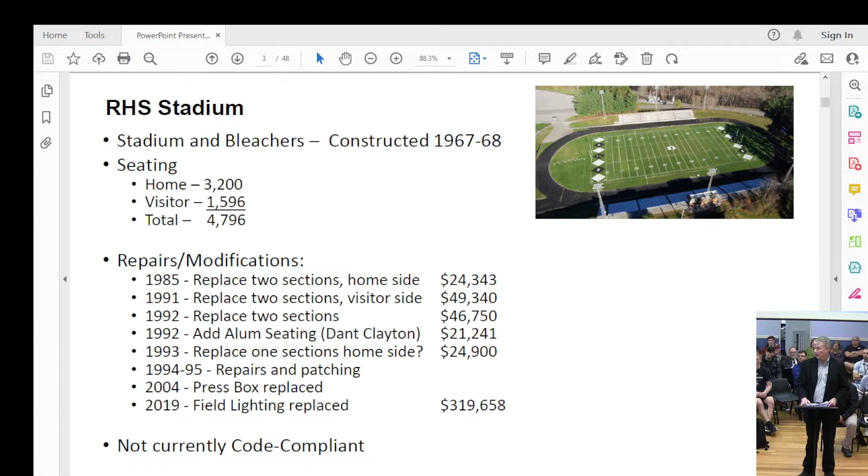My understanding, I think Mr. Coffey maybe took this photo, I'm not positive, but I think I saw it on the boosters. No? Somebody said someone had a drone. I stole this off the booster site because I thought it was a nice, relatively recent photo.

It shows the field nicely groomed. You see the new lighting's in place, and the stadium everybody knows and has come to love. I'd say it's the envy of most schools in Southwest Virginia. It's certainly one of the nicest places. The playing surface itself is, I'd say, second to none for natural turf across Virginia. It's a beautiful place, and I always enjoy going there. I've watched my own children play and perform there, and they still do today.

So a very nice place, but keep in mind it is 55 years old now, so it's going to age just like the rest of us. I'm a perfect example of that. So here's our home side. As I said, seating on this side is about 3,200 seats. You can see where the aisleways are right now, and some of the reasons why it's not considered code compliant.

When people say ADA, it's not just about wheelchairs. ADA covers all sorts of disabilities and just being mobile and how you move around. Obviously it's difficult to get up to where the seating is, and there are no designated wheelchair areas. From a building code standpoint, there are no railings to speak of. The stairways have no railings. There are no guardrails on the sides. The guardrails in the front are too low and don't have intermediate pieces. So there are a number of code issues.

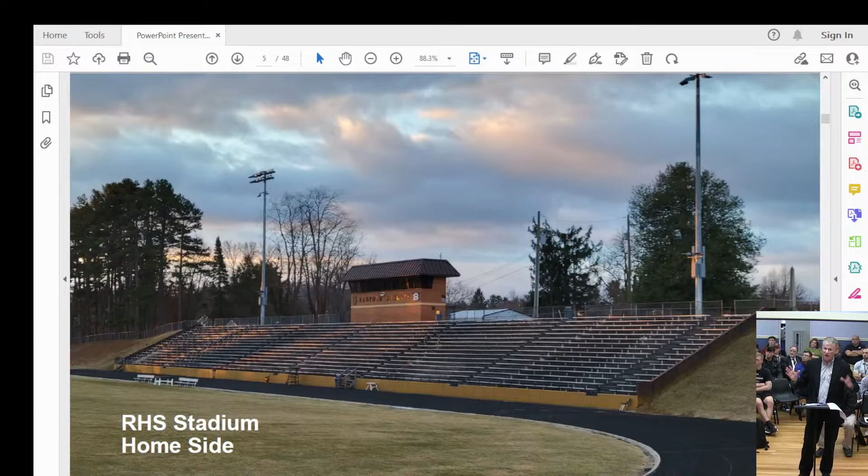But overall, the structure, particularly the frame, based on our recent analysis, is in really good shape. The brick really needs a good cleaning, and a lot of the joints could use some repointing. But the front wall, the concrete, shows no signs of stress fractures, and the frame is in pretty good shape.

Looking at the visitor side, about 1,600 seats. There was an effort, you see there in the lower left, right in front of the new light pole, a small blocked-off area for wheelchairs to sit.

There is an accessible walkway up to that, but my belief is this was probably installed shortly after the ADA became federal law, somewhere after 1990, probably before '96, because looking at aerial photos, it's not in one, it is in the other. But I found no records for that. While it does meet accessibility on that side, it's not in the spirit of the ADA. ADA is supposed to provide seating throughout, so that you're not isolated in one area.

But similar issues there with regard to handrails and guardrails and just access to get into this, because the hillside in the rear there is pretty steep. Speaking of that access, you can see here it's probably almost a 10% slope getting up from this east entrance into the site. This also, I believe, is considered the handicap entrance to the site, because we've been bringing wheelchairs around the track and allowing them to sit on the track down on the north end of the home side.

Obviously, Porta Johns right there as well. You can just make out the, well, this will help. On the middle slide here, that's that access point to that cutout handicapped area. To the left is the incline. I believe that was asphalt at one time. It's really degraded quite a bit. When the lighting project was done, some stone was added in there overall, because it was eroded quite a bit and quite a bit of dirt. So not considered an accessible walkway right now, but that can be repaired.

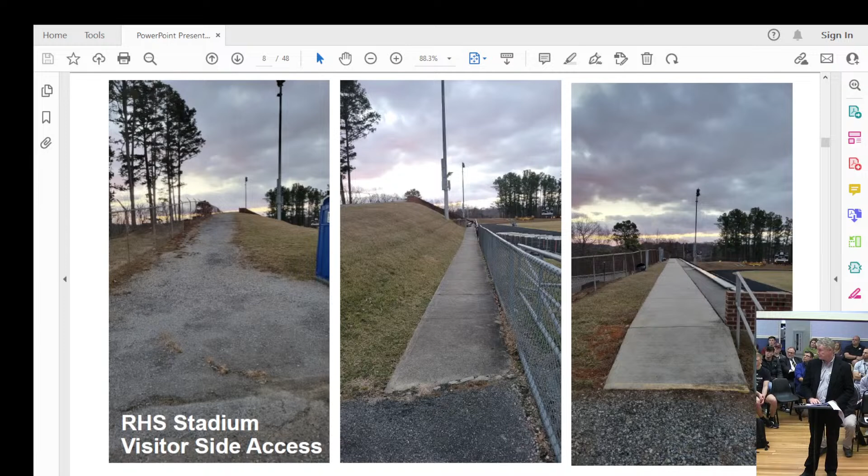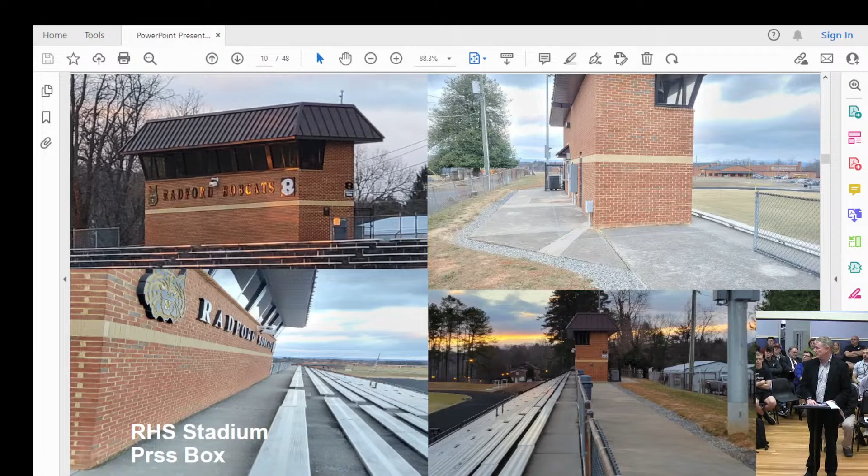So all in all, I think everybody knows it well. It's been a great stadium, continues to be, and there's no better place to be on a Friday night. So it's a great place. It really is.

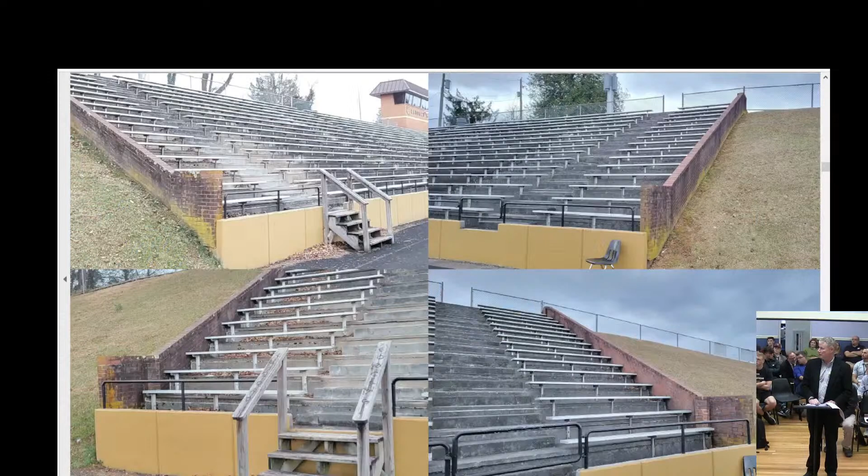Sorry, I forgot about this one. This is just highlighting again some of the code issues, but also the brick walls that kind of sandwich and hold the stadium together, and then the concrete wall in the front. Again, structurally in very good condition. Saw no stress fractures. The brickwork, you can see quite a bit of mold and mildew growth on both sides. I do recommend that be cleaned, and there are a number of joints that would need to be cleaned out and repointed. But again, structurally it seems fine.

You can see the guardrails in the front. They're too low. They don't have any subdivisions in them.

No rails in the stairways. Certainly a stair such as that does not come close to meeting any kind of code. So I won't belabor that point.

So here's where everything started for us. Back in September, Mr. Graham notified us, asked could we go over, take an engineer, take a look at the stadium. There had been reports that there were some holes in the stadium. That was pretty much all we got.

So we did go over the stadium, I believe it was the next morning. Both the engineer and architect were there. We discovered the holes; it wasn't too difficult. They were as big as 4 inches in some areas. It was noticeable the amount of patches throughout were beginning to fail.

Some cracking, pieces had fallen out. You could see where mesh had been added years ago, I believe, to help hold the patches in place. Now it's totally exposed and probably contributing to some of the degradation because it holds water now instead of letting it go out.

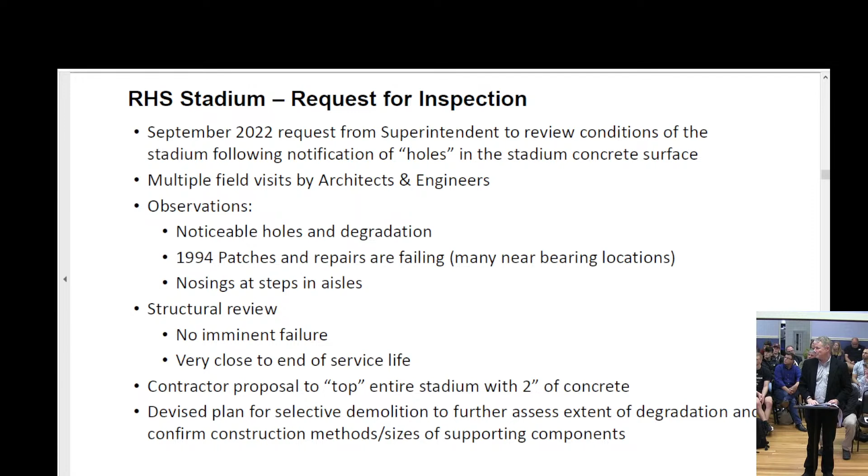Our concern is, one, obviously the debris is a tripping hazard, but where that is degrading, it's bearing on that piece there—that's what's supporting it. So there's only about 4 inches being supported on the front edges, and end to end there's about 6 inches, and I'll show you some pictures of that.

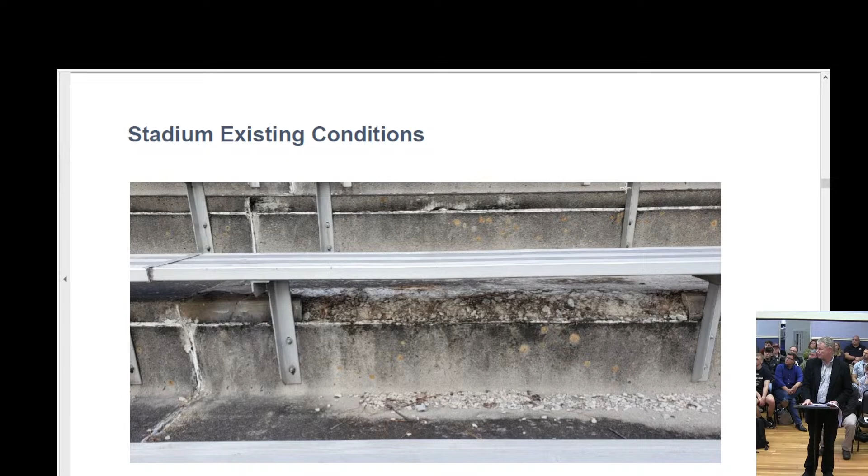Here's the 4-inch hole that we went to look at. This is what the concern was, and that's probably 15, 16 inches long in this direction, and about this wide.

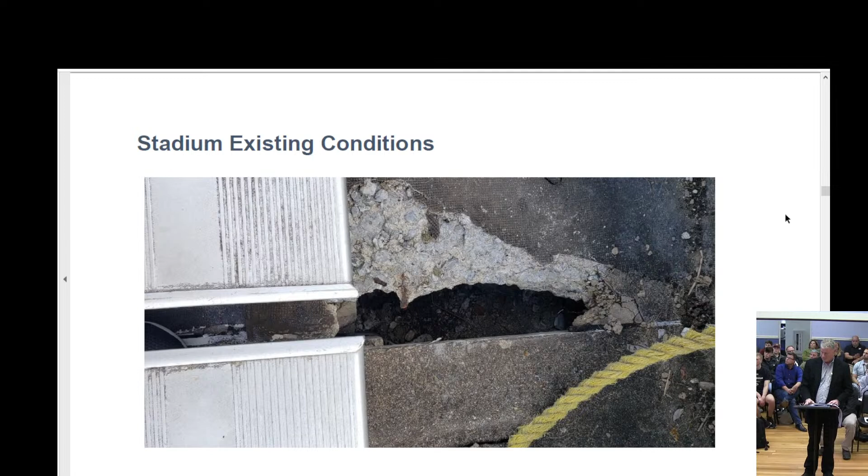You can see some of the mesh where patches were made previously, and these patches are now 30-plus years old. But because it's worn through and the mesh is exposed, it's holding water there now and just contributing to, or accelerating, some of the degradation.

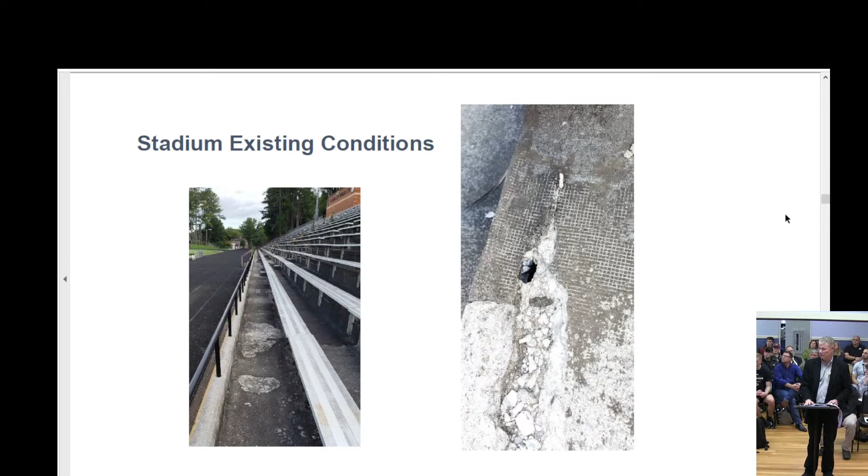Again, if you look across here, these are all different places. You can see the erosion of the concrete planks. This is a different place from the other photo.

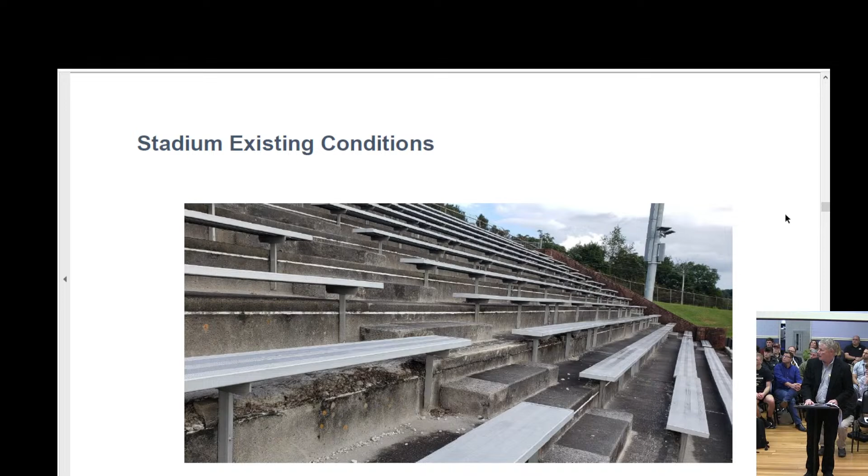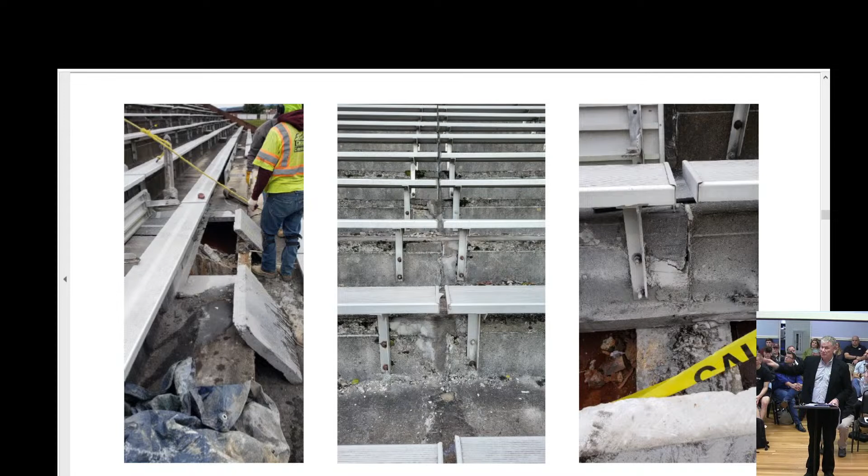The home side, for the most part, is constructed on a natural forming hill. One end was cut a little bit, and the other end was just a little bit of fill. The visitor side has a lot of fill over there, and we have located drawings since then, and it's a much different type of foundation system on the visitor side.

But we wanted to make sure that where these holes were, there wasn't evidence of water infiltration that was eroding underneath and eroding the foundations. There did not appear to be any evidence of that.

We were able to see the connection points of the planks. They're actually designed to be welded - one side of the plank is welded and the other side is just lying there, so it's able to move, not unlike, say, a bridge design. And then on the other end, it's the same kind of thing. So it's connected on one end, free to move on the other.

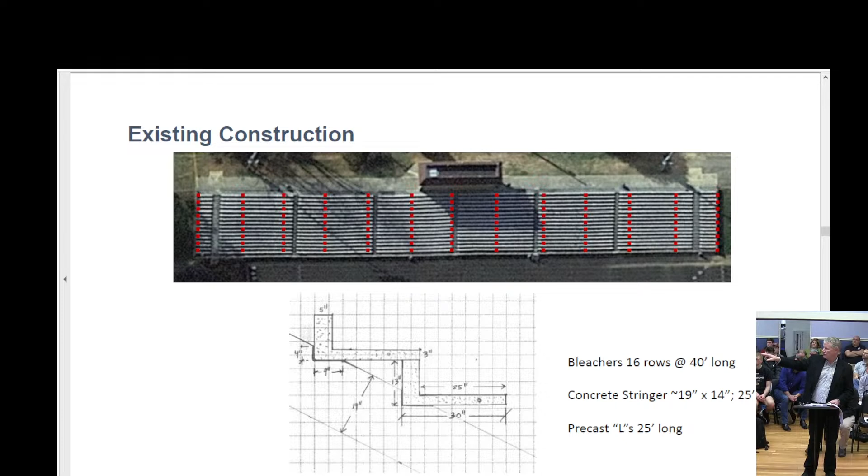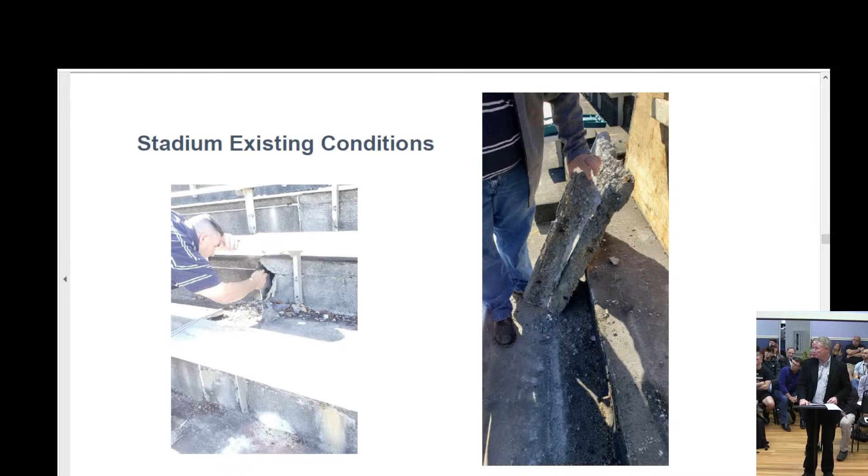This is an area of the original, to the best of our knowledge, because there are some minor differences in the forming of the precast. It's a little hard to see in this photo, but through these sections it almost looks like we're getting a sag. I think it's more of an optical illusion, I think we do have a straight line. It's just that the top layer of the precast is peeling off.

You can see there's a lot of little stress fissures throughout this portion. All of this is degraded across the front. Again, those are bearing points from the L. It's sitting on this L all the way along there, so that's a concerning area too.

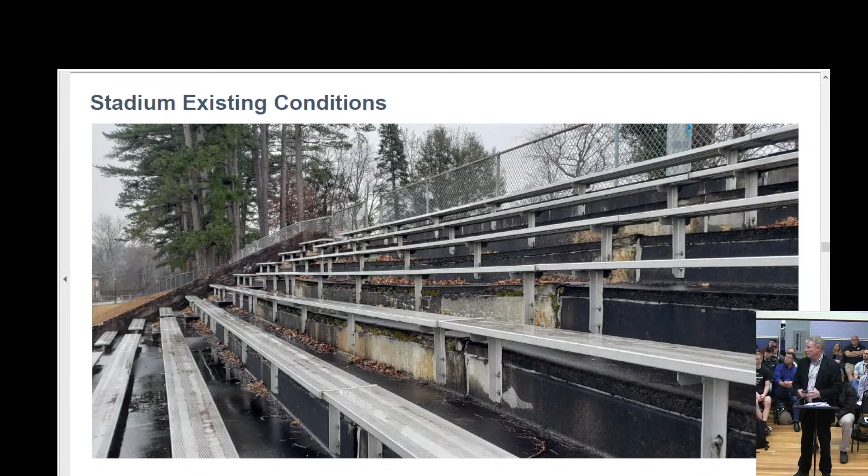And then finally the stairs, which are where everybody's coming and going, right? And when there's a lot of people, there's no handrails, we're not looking down. You can see entire sections there are just sloughing off the front. So that's why we have concern.

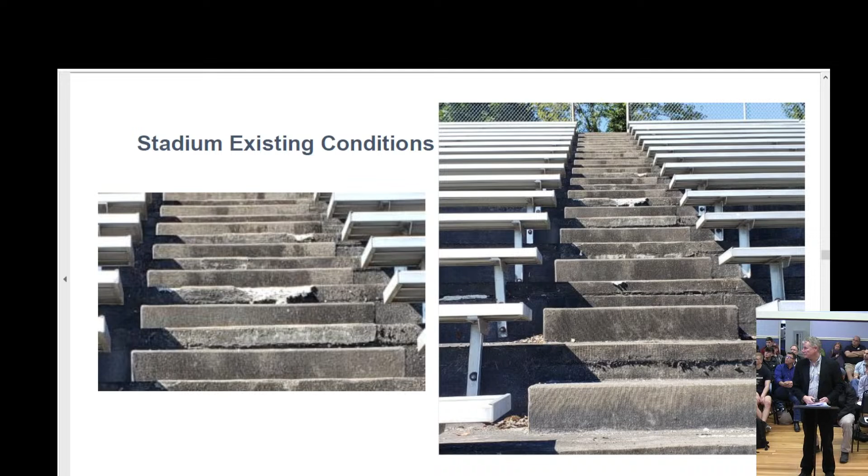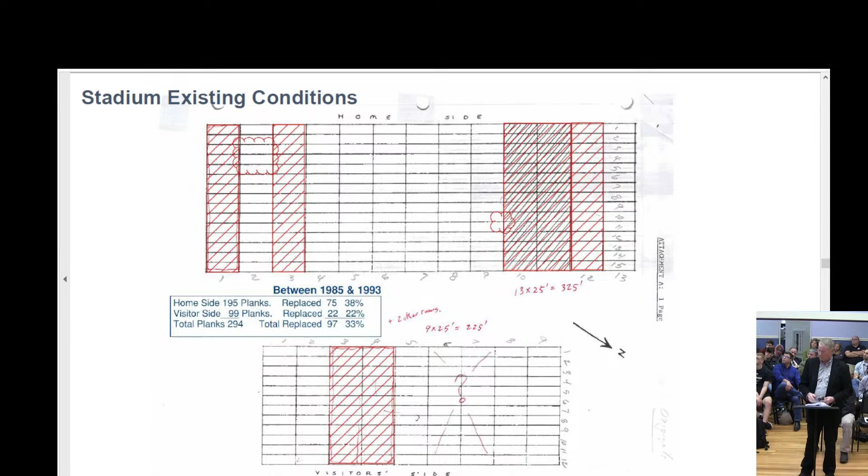These were the findings that we had, and that we've put in a formal letter report to Mr. Graham. And this is what I talked about in our November 8th meeting with the board - what our conditions were, what our findings were. You can read these for yourselves. But again, we said there's no imminent structural failure, and we felt something needed to be done soon.

There's 3 options I presented: repairing, going with an aluminum bleacher system, or a new precast system. And at that meeting I said, we don't recommend the repairs at all. It'd be very costly. As the contractor indicated to us, it'd be cheaper for him to do other things than that, and they're not going to hold up.

I mean, think of anything that you've tried to repair. If you try to glue something, if the surface isn't perfectly clean and good, it's just not going to hold. And that's the situation we have with so much of the sloughed off edges. It'd be difficult to get it to hold for any period of time. So that's what we had recommended.

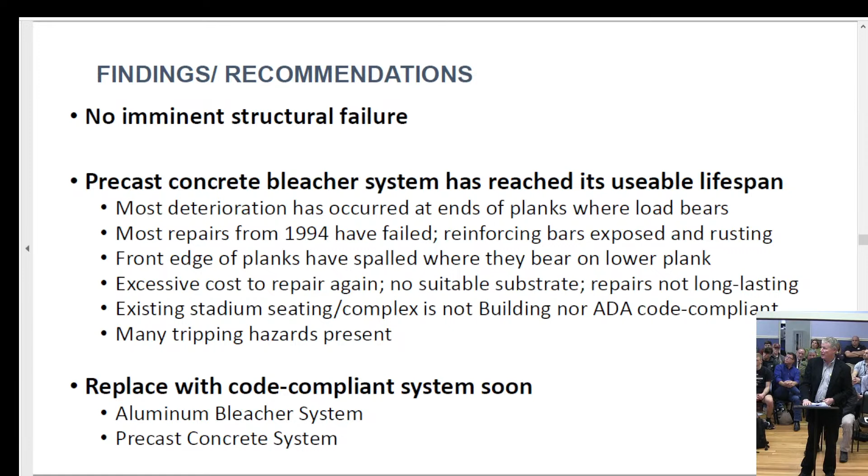The question then posed to us was, well, what can we do and how quickly can we do it? Can it be done so it's complete in time for the fall football season, 2023? So we were going in all sorts of directions trying to figure out. We were talking to contractors, talking to various bleacher companies. We had many come out to the site, look at it, doing some high-level cost estimating, square foot cost, that sort of thing, not knowing everything about what was there.

We were concerned about, as we all experience here with the McCarg project, the impact of post-COVID - well, pre-COVID, now post-COVID, but there's still a lag with regard to lead times and labor shortages and that kind of thing. So we've seen it, we heard it from the bleacher manufacturers. They told us, if you told us to start today, it'll be anywhere between 150 and 180 days before I can get it on the site. So doing the math, there's 6 months.

So we determined a schedule that, well, if we were able to get somebody on board, get them on contract by February 1st, it's got to be completely designed.

They could do that in about a month. It's proprietary designs by these bleacher companies. It's design build - they do their own design and structure for the bleachers themselves.

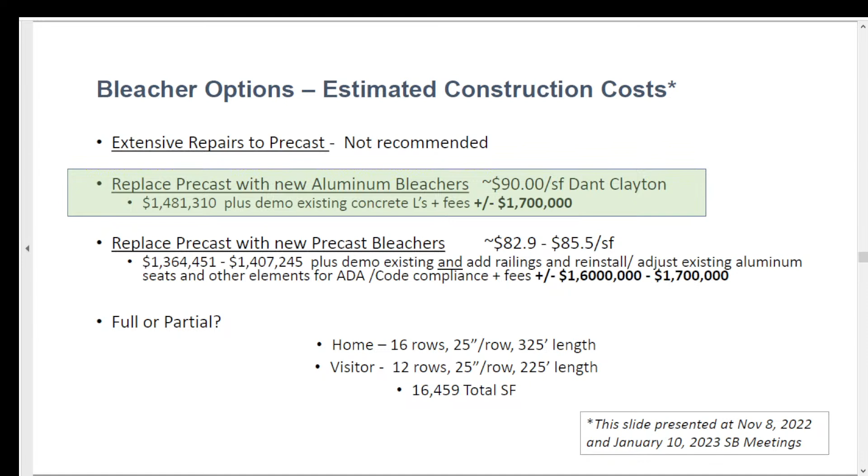Now, the big question was, how were they going to do it? Were they going to build it on top of what's there right now? Could they build it on the existing stringers? Did they have to remove the precast anyway? We spoke to three different folks, and all of them gave us different answers. They weren't sure - they were going to have to design it, see what the loads were, and so forth.

So we went from there after the board said we weighed the benefits of the aluminum versus the concrete, the time frame. I'd say in my summation, the thing that won the day was the longevity and durability of an aluminum system, and that the aluminum systems were not the typical kind you see at a rec field baseball park. You know, they don't have the open vertical pieces - people aren't dropping purses and trash and falling off the back. They're very different systems. And I referenced the Radford baseball field stadium, which is about 10, 12 years old now.

It's a self-contained system. It's an integral floor, it's got drainage built into it. You don't see anything through there. And they built that on top of the existing structure, if you know what that looked like, and I have some images of that. And just pure coincidence, Chris's company did that project. So that was the direction we went in.

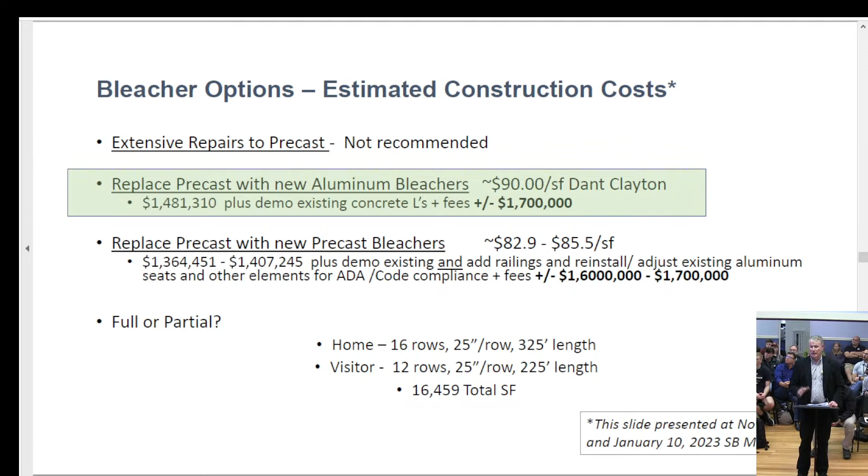So we're going to pursue an aluminum bleacher retrofit - infill, perhaps, would be a better word. And this, I presented this in January, this slide, word for word, how we were going to go about doing this. Now, let me take a second to explain why we went with this RFP process.

They are all telling us it could be done a different way, okay? All three of these companies have cooperative agreements, so that means if the school wanted to - it's not unlike furniture being on state contract, you need a new chair, you can just go buy it because you have a predetermined price. Well, they all have that. So I could have gone, or the school could have gone to just any one of these and said, all right, let's roll with this. At the time, we'd been speaking with Dant Clayton - they put the other seats in. They're, again, a pretty well-known bleacher company.

Or we could have designed a system. It would have taken us a couple months to go through it. We would have had to do very specific geotechnical engineering, foundation engineering, all that. It would have put us at the end of April before we could bid it. And then you got another 30 days, 6 weeks before we can get a bid and get it under contract. So then we just lost that whole summer time frame.

So the scenario that we proposed, and I think it's really worked out well, was to request a proposal. So it's not a hard bid, and I'm going to reiterate that, it's not a hard bid. The school does not have a contract with anybody right now to do this, including, I don't have a contract to do anything on this.

But this way, we could get them to look at it, spend their time. They all came out, they researched it. They gave us 3 different proposals, and they varied pretty widely in costs, and they all had a different foundation system. So that's one reason why I think this was beneficial to go this route. We got their thoughts, their ideas, and to help us make a decision. So that's why we went through.

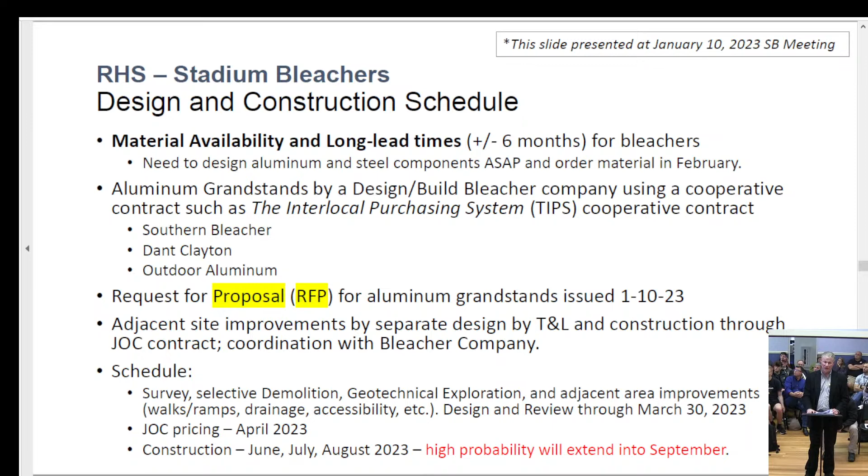I reviewed this with everyone. This is what was in that RFP. This is what we asked them to provide to us. That's what we got. We received their proposals just Thursday, 5 days ago. Everybody provided that information. We included in there, here's the time frame that you have to install this in. And then, again, we received these last week.

First one was from Outdoor Aluminum. Again, a lot of these companies, and Chris's company is one of them, they work with other designers and design builders and then the manufacturers, and they represent different companies. But this particular one's from Outdoor Aluminum. I believe they're Texas-based, is that right? Alabama. That's the price they gave us, okay.

Dant Clayton, who we were originally talking with, they gave us this price. If you recall, when I had that high-level estimate, Dant Clayton gave us a cost per square foot of $90 a square foot. So they looked at the design, they put it together. Well, look, it's almost $110 a square foot. So until you actually have something for somebody to bid on, you know, an estimate's an estimate.

And then finally was the one from Chris's company here, and you know, very competitive. But the best thing about this proposal is that the top two required all the precast to be removed. The first one wanted it out of the way completely. I'm sorry, Outdoor Aluminum's foundation system was proposing 12 by 12 spread footings for all their columns, so they needed everything out of the way to do it. Dant Clayton's design required everything out of the way, including the stringers, because it interfered with their structure overall.

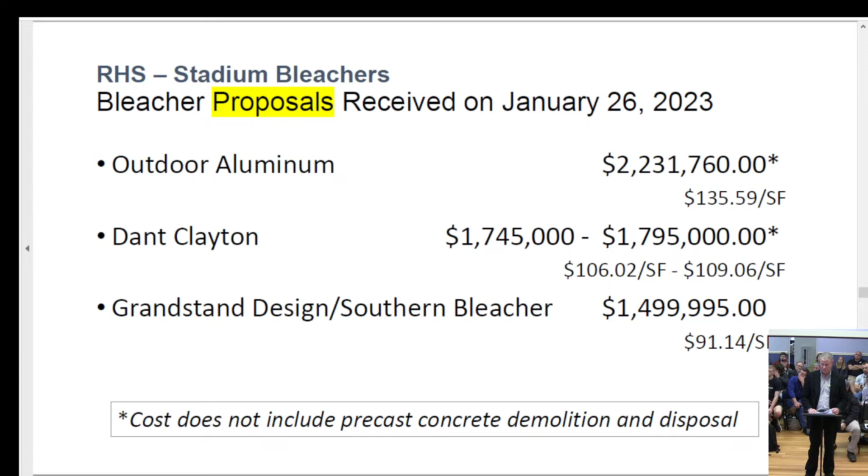If you remember, I asked if there were any objections if we were able to leave that there and not pay the cost of removing it, and that's pretty much the design that Chris's company proposed. So, yeah, it's been a lot of information. Anybody have any questions up to this part before I get into their proposal and explain the details of that?

I'm gonna take a drink of water too.

I have one. How much is the cost of taking the first two bids? What's added on to that? You said the price wasn't for demolition. Well, it would vary because one required only the precast and the other one wanted everything out. I'm going to say, based on numbers I received today, between $150,000 and $175,000 to take that out and dispose of it. And I do have that itemized a little later when I'm trying to show some comparisons between the two.

So this is kind of a quick summary of the proposal from Grandstand Design. As I said, it was the most comprehensive overall. It was retaining a good portion of the precast that's there, and what is being removed, that cost is in their proposal number. Remember, it's not a hard bid. We're still talking to them about some modifications perhaps. We can do that because it's an RFP, not an invitation to bid. They're under a cooperative agreement, that sort of thing. So again, it's the best of several worlds.

They would include the removal of the existing seat planks and recycling those. They itemize that cost. It's figured into it, but it's about $8,000 worth of savings just to recycle the aluminum that's there right now. The type of foundations, they're called caissons. They're basically going to drill holes, about 30-inch diameter, from 10 to 12 feet deep, and they work primarily on the friction of the sides. They don't necessarily depend on what they're going to bear on.

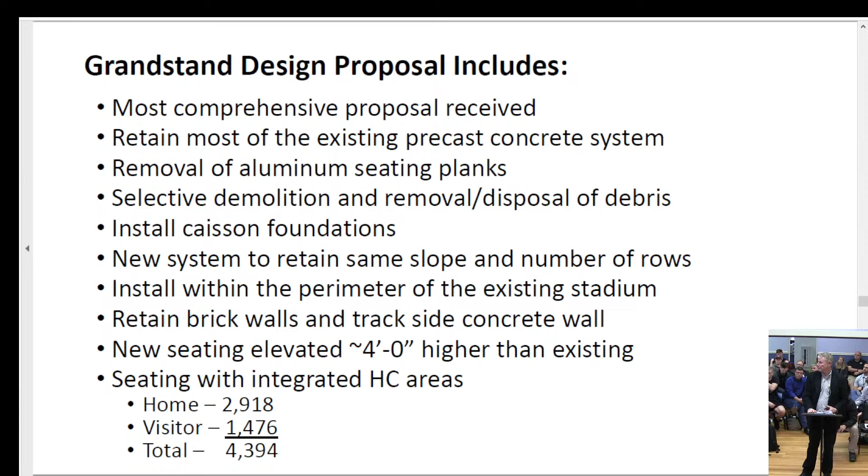However, that's when I said, you know, if this is the end of September, we've got a game the last week of August. Is there any way we can improve on this schedule, or are there any other phasing options that we could look at to make this happen? And we spent a lot of time speaking with Grandstand about that, but I think this is a good time for me to take a break and let Chris tell you a little bit about his company and more of the details of what they proposed, what those systems are really like. It's not your grandfather's baseball bleacher anymore. It's a very different kind of product.

And I'll be quiet here, Chris. Careful with this thing. Sure.

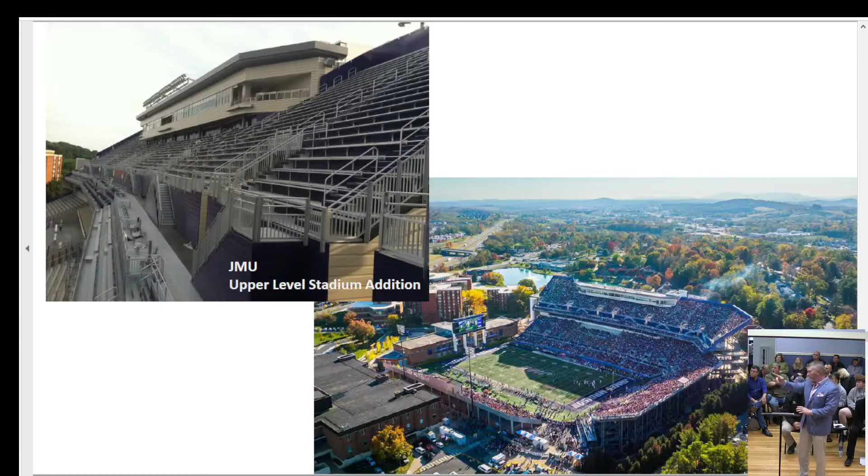This is just a photo of what one system looks like completely finished. Actually, right there, I also had the pleasure of working with James Madison on their upper level stadium addition. Now, a fun fact about this job is that was originally designed as precast concrete. That whole structure was designed as precast concrete. And they opted to go with a pre-engineered system instead, mostly for what Jack had said earlier about the durability

is unmatched. It's unmatched. Aluminum and RG60 hot dip galvanized steel, 80 to 100 year life cycle in this particular climate. Now, we can't say that over on the coast or down in the bayou in super humid climates. But in this particular climate, inland, 80 to 100 years before you see any type of great degradation that unfortunately you're experiencing with the concrete at Radford.

So I often refer to this, frankly, as the largest display that I have in the country. When people say, do you have any samples or a display we can look at? I said, yeah, drive down I-81 South and just look to the right as soon as you go through James Madison, and you see that right there.

Now, this past summer, we had the pleasure of working for University of Maryland, Baltimore County in Catonsville. Very, very similar project to what I'm proposing for you guys. And knowing the importance of aesthetic, and just another sidebar, I view my function in coming tonight as a means to clear up confusion.

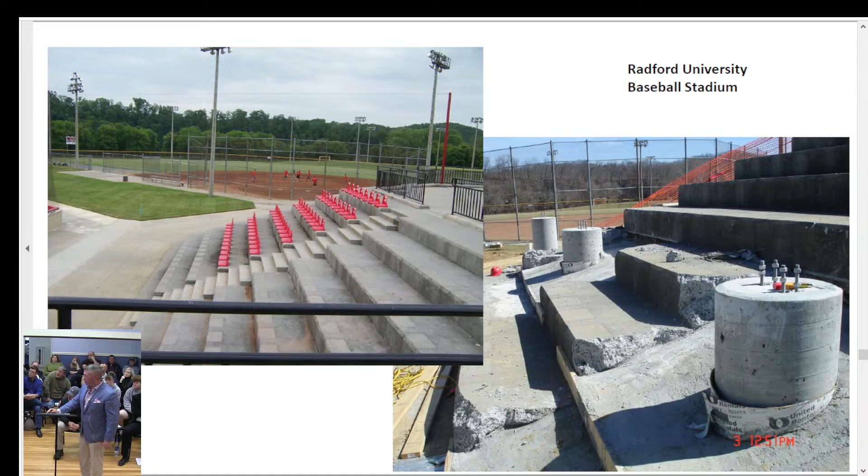I'd add one thing to that too, is that similar to Radford Stadium, with the constraints, we have a fixed top portion, right, where we access it, and fixed at the bottom. And this is the same. Correct. They matched, it's a smooth transition at the top, and then a smooth transition at the bottom there too. So again, it was kind of an infill. Correct. With given elevations. If I remember correctly, I think we had to re-pour that concourse up top. We did have to elevate that slightly, but it was all done within a couple inches, yeah.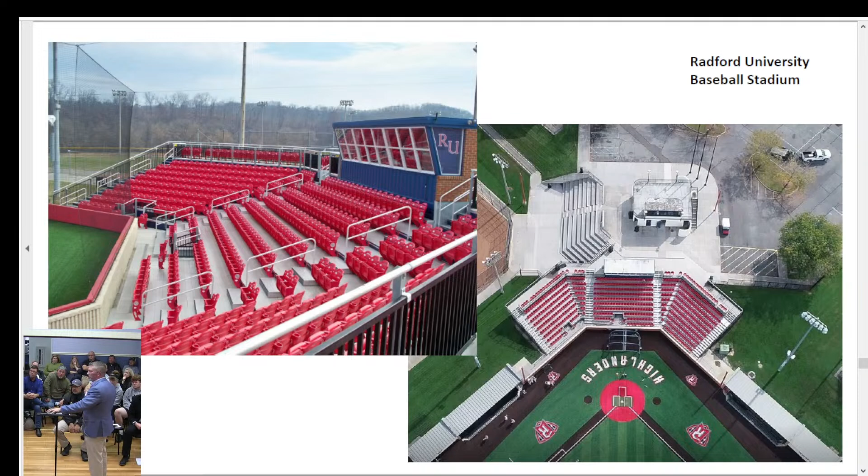So, let me apologize for the crudeness of these sketches. We really wanted to meet your deadline to get the RFP in, and truth be told, none of the real design process starts until after an order, but I can tell you with certainty that this is a very, very good idea of what the finished product would be like. So our system, 324 feet wide. That shows the approximate locations of all of the piers, and we're coming up with 2,918 seats.

The top there, where you see, excuse me, this right here represents handicap ramps, and these two little squiggly things on the end represent stairs. Code says for that capacity, you have to have at least 4 widely separated means of egress.

We achieve that here. Also, talk about a fun gathering spot. We have a rear walkway all the way back here, which is also a code requirement when you have a stand accessed from the rear.

In a traditional stand built on a flat site, you have a wide front walkway where everybody comes in from the front and goes up. In your case, everybody comes in from the back and goes down, so it's just the opposite.

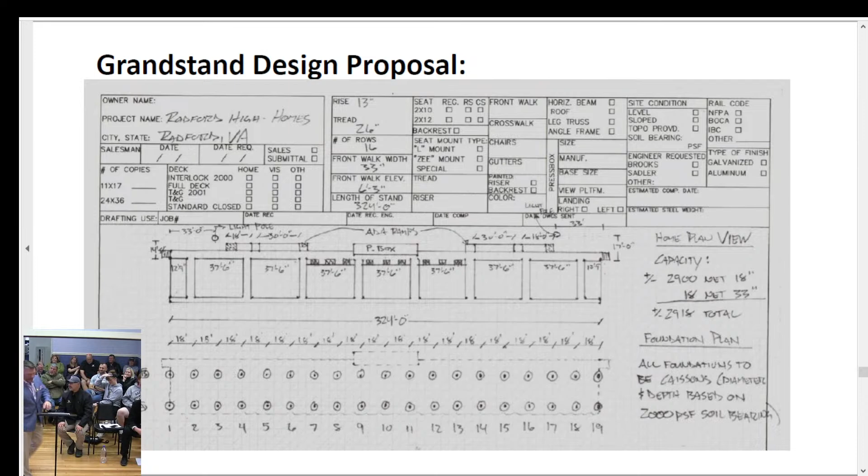And I'm going to stand by these dimensions. We have another colored slide to show you in a minute that will show you the elevation difference between structure and the wall. In the back here, the rear walkway is going to be elevated approximately 4 feet above your existing concrete concourse back there, and that's because of the rake of your stand.

I matched the rake of your stand with the rake of the new stringer, that's what that's called. And just how we had to set the foundations, that's where we landed up, roughly 4 feet above.

So the benefit of that is you have a much better sight line than the concourse right now. If you're standing on the concourse right now, you're basically 4 feet under where you will be on my system, and you'll have an even better sight line of all the action on the field from back there.

Sorry, I keep thinking I can move that from up there. The Promethean board in here.

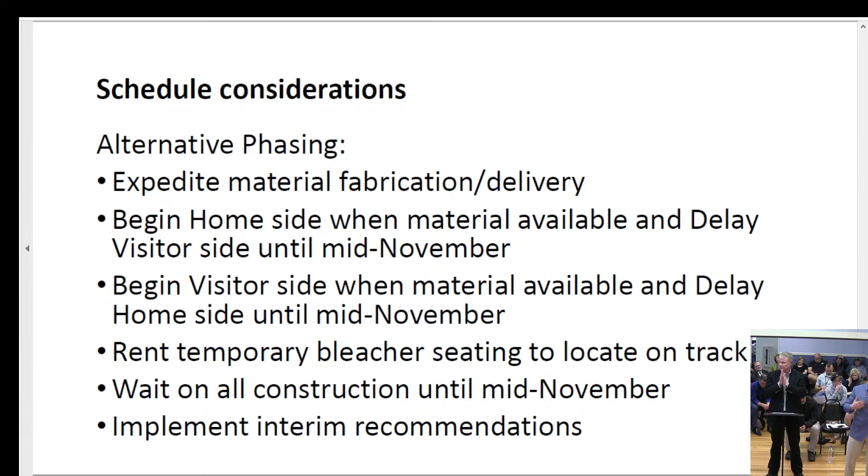So really, the bottom line, there's a lot of options from a scheduling standpoint, everything from what was just outlined to not doing any of them and just waiting until football season's over. Still go ahead and complete the design. I haven't really thought it through all the way in terms of the accessory areas and things like that, whether that could get taken care of during the summer or not.

But obviously, if we delay the start until November, that also means the start of drilling the piers and that sort of thing. So the whole thing would go into the spring, but be finished before the spring track and field and soccer season. So those options are there, and as Chris pointed out, it's not any additional cost right now, as long as these are the only things we're talking about.

If I may, the aluminum and steel market, because it's commodities, it's all over the place. With your particular project, I was able to catch it at a real lull. My inside sales guy, who is not supposed to do that, he's not supposed to bid a job off the lowest price on a particular day, he's supposed to pick one in the middle. Well, that helped us out a lot too.

But I can't hold that price indefinitely, and I have to lock it pretty soon, as a matter of fact. Once I lock it with them, whether we rush, nose to the grindstone, to get something done by mid to late September, or whether we wait until the end of the season and start, it's the same. I need to lock the price because the steel and aluminum is by far the largest component of my number, and I need to lock that.

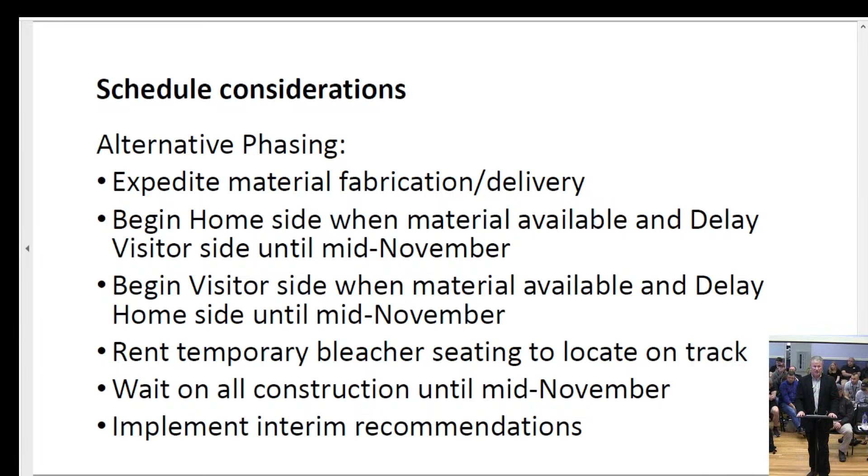So we have a number of potential recommendations, and a lot of it is dependent upon what you decide to do, what direction you want to go in. I think the phasing end of it does not need to be decided right now, unless you're confident about something.

As Chris said, as long as a decision is made to go with the infill system, we would want to do that in a timely fashion to retain the pricing that's been presented, because again, those aren't actual bids, those aren't hard bids.

We're still working with his company. We're talking about getting a stair added at the bottom that would go off on the side, some tweaks here and there to make sure we get what everybody's looking for. But it's hard to decide what else to do and what to recommend until we know what the pleasure of the board is if we continue going in that direction.

That's a common component of the design build world. In design build, you save a lot of time off what he said earlier, hiring his firm to do the whole complete design and send it out to bid. After it bids, and I win it, I usually do, I then have to go through the whole design process again, because we're never going to fabricate anything off what he did.

We have to do our own thing. So this is the most efficient approach, and the thing about design build, what I'll show you in a minute, there's always a contingency put in to try to anticipate some of the changes that are going to happen as you go through design build, so that it's covered.

So if there's a plan of using the existing structure, particularly the home side—I don't know if I said it before or not—the visitor side is in substantially better condition than the home side. That's why one suggestion was to let everybody sit on the visitor side for the first couple games, and if need be, we can put removable rental bleachers on the track. But no matter what the decision is, if you're going to use the home side, we've got to do some temporary fixes to it, okay?

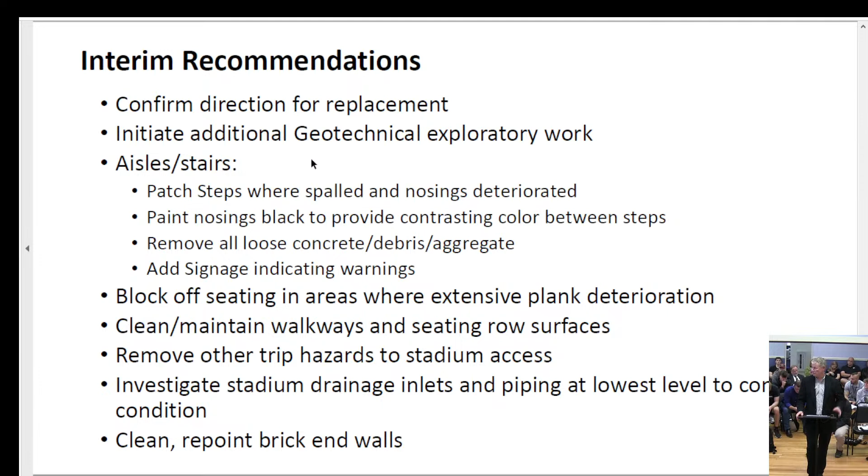So we have a proposal in hand from Schnabel, who's in Blacksburg. We're going to cut some holes through the existing structure, drill through it, and then do some 10-foot deep hand augers right where the footings are proposed to be. So we need to get some of that data. That can happen next week if we want. But that's some of the preliminary design work that's going to need to be done.

So he was willing to forego that until the actual restrooms were undertaken. The other thing I'd recommend is that the brick walls be cleaned and repointed, to make them look close to what they looked like 55 years ago. I was unable to find when the brick walls were installed. I don't believe they were original to the stadium, but I haven't been able to confirm. I found on the original stadium drawings a space for them to sit on, but not for the brick itself.

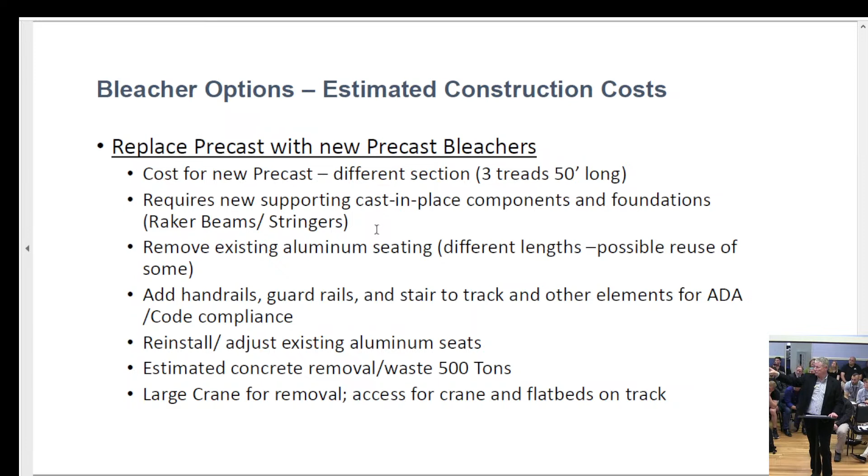So all these things went into this next, again, high-level estimate. On the left-hand side is the aluminum infill bleacher system, and I'll go down through the side here. The top item is the actual in-hand proposal that we have from Chris's company, just under $1.5 million. My guess is with a couple little things we talked about adding, that's going to go up a little bit. But when you look to the corresponding right side, that number on the top is what we got today for these three-tread 50-foot sections.

Roughly 1.46 there. Again, they're high level, similar to the numbers I presented before. Until they actually bid something, they are estimates. We need to put new foundations in, those rakers that we talked about to support this new 3-tread system that are on 50-foot centers. The price that I got today for the demolition and disposal was right about $150,000.

New concrete stairs, $200 a piece. You got to build a formwork for each one. The material itself, probably half of that when you get it all there, and then obviously the labor for it. And then new aluminum seats, all the railings, all the guardrails, the stairs, that kind of thing. I don't have a firm price on that, but I can tell you it's in his bid. Okay. Same with the cast-in-place foundation, the raker beams, those two with the double asterisks. That's kind of our internal feeling at T&L, but I don't have a backup number to support that.

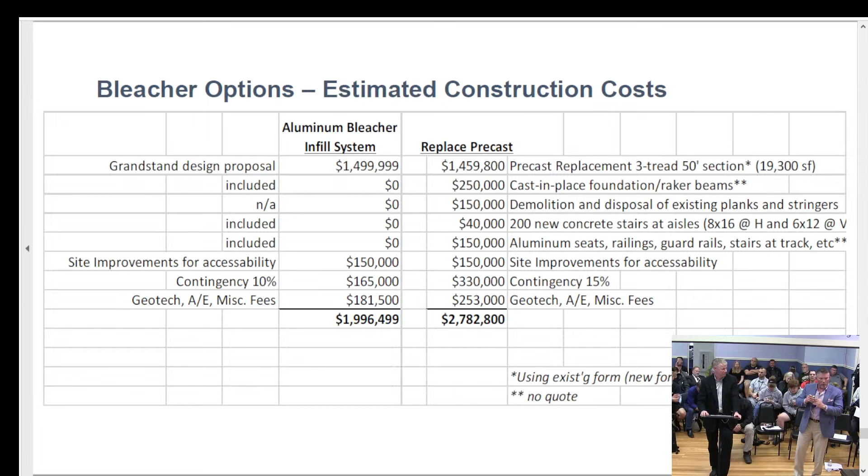So the best thing I could say is, since the Radford University baseball stand is literally right down the street, when you get a chance, go there and see. Our system is a fully closed interlocking system. Each plank locks together, so you're going to have structural members every 6 foot that are very solid when you stand on them. And then when you walk off of those, because it's aluminum, even though it's locked together, it's not going to feel like concrete. That's 100% the truth, all right?

But it is very durable. It is very sturdy, and that's one of the reasons we do the planks locked together, because that gives you a sort of longitudinal structural integrity perpendicular to the structural member that's underneath. I believe that facility is open pretty much any time, and to go walk on it and see it would be beneficial, so you could judge for yourself.

Aluminum is typically a little bit louder. We have things we can do to mitigate that if it's a concern in the community when we're doing the install, sort of like an insulating factor that would quiet things down, so we could explore that as well.

And while it would be an add, it wouldn't get you to anywhere near where the precast price was. Okay, so that's an option too if that is a concern, and that's part of the purpose of this forum, to voice the concerns and have me clear up confusion, answer questions. So I appreciate that.

Thank you. Now, what about if it's wet? Oh, there's slip resistance. Yes, our extrusion has a rib in it, just by its nature. So our mill finish extrusion carries what in the construction industry is called a coefficient of friction, a 0.5 coefficient of friction, which is the same as this floor. It's a building code that any floor you put in a building has to at least have a 0.5 coefficient of friction, so that's considered not a slippery surface.

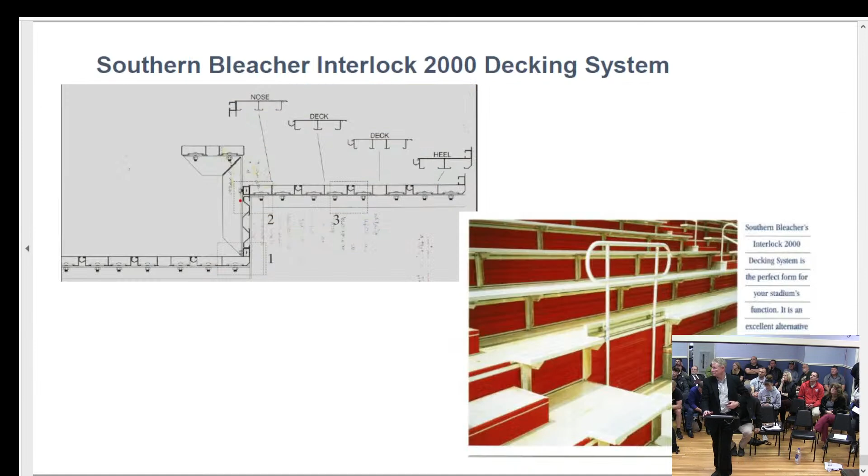You're on the slide right there. What I'm referring to is we need to do a foundation system - those are I-beams right there. We can, with just some very small columns, lay our stringers right on top of the precast.

I have to be honest, when I first heard it was a precast stadium, and considering we're getting ready to start this job at Annapolis High School, that's exactly what I went to. I thought in my head, we're just going to go out there, we're going to look at this.

Yeah, it might be a little messed up in some places, but I'm sure it's not going to be so bad that we can't just do a basic overlay with minimal structure. But that, unfortunately, is just not the case for you guys.

So what drives it is the elevation. This is the top of my concrete pier, as well as the size of this I-beam that I have to size in order to span these piers. This I-beam has to carry that load.

That drives that. I actually want to stress something - while yes, we're elevated 4 feet in the back, if you can go back to the slide that has the side view, the colored side view - we measured this wall from the existing concrete deck and from the grade, and this is all you see from the side when we're done.

Yes, it's going to be elevated, but if you'd like, I can forward some photos of similar situations we've done, so you can see the facade, how it hides the structure, and then the fence on the back. I think that might be useful.

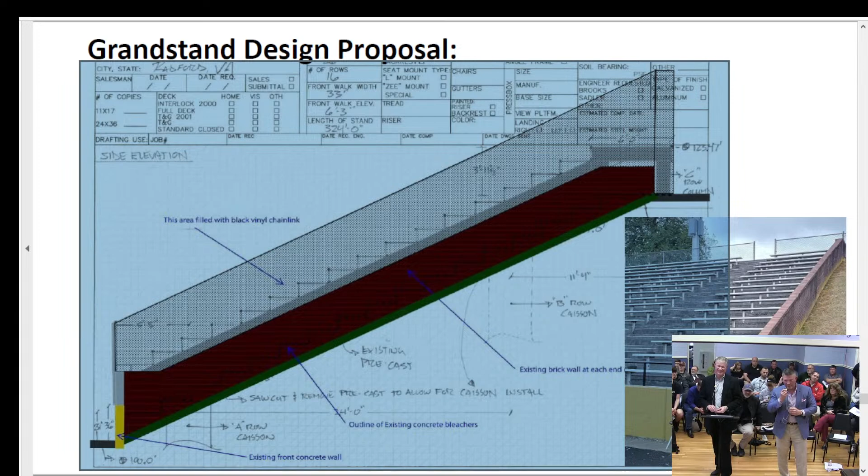Did you by chance do a stadium that's very much like what you're proposing? Independence High School in Ashburn? Yes ma'am - Independence, Riverside, Tuscarora, Woodgrove. Really would love to see some pictures. Certainly.

I can provide those for you. I can send that to you too. Yes, I've sent it to some. I can send it to you.

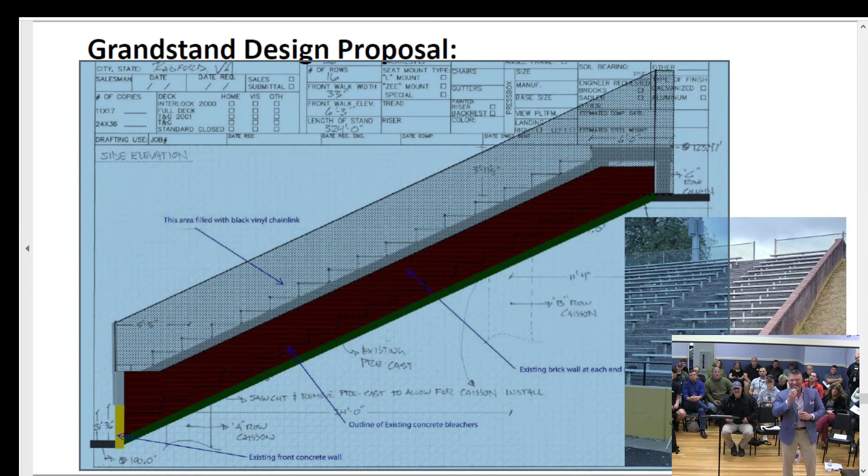Oh really? I try to keep, when we do stuff like this, the photos relevant to that project. And that's a completely different project than what we're proposing for you guys, but I'm happy to send you those photos.

Oh, it is, absolutely, yeah. Independence is a classic pre-engineered bleacher system, home and visitor side, built on a flat site with tons of space and asphalt paving underneath and all that. It's not on a hillside.

It's not. But the thing about Loudoun County that I get a kick out of is they build the same school over and over and over again. I can literally go back 10 years when they put a bid out and just adjust my number - it's always the exact same thing. They save a lot of money building the same high school and the same amenities everywhere.

But yeah, I'm happy to send you photos of anything, but that's not going to be representative of what we will look at. Right, but I can get photos of some rear facades and walkways, so you can see what that looks like. Let me add just one additional comment here.

So these two beams, which are spanning 25 to 30 feet - their whole span is 30 feet. The beam is, but the foundation spacing is anywhere from 18 to 24, depending on what we got going on. So that's obviously significant depth to it.

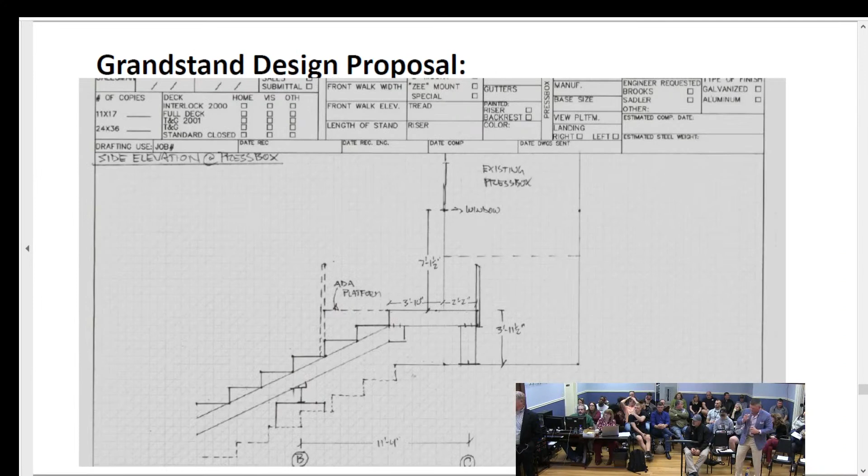But this beam going in this direction, the raker beam, unlike what you have now, these are on like 6-foot centers.

Correct, yes, it adds a lot of rigidity to this thing. If you think about it, you have two steps and you're over top of another beam, so you're not going to get that bounciness. You don't get the bounciness on the interlock system anyway. I'm just saying you're going to notice a difference, but it's not going to be like the old school interlock where you're basically walking on a diving board when you walk between.

What type of yearly maintenance is needed for something like that? None. Another advantage of this system is the cost of ownership. I also couldn't believe what you guys have spent on this system in the last several years. A precast system should never cost that much to keep up. But with my system, the cost of ownership is zero.

It does move because aluminum will expand and contract, and obviously when you load it with people there's some stress on the understructure. The design is such that the bolts are torqued to the point that after an earthquake we'd probably have to come out here and tighten some things up. But after even a rowdy football season, or ten football seasons, you don't have to do anything.

I can tell you that in the Code of Virginia, you as a school, and anybody who owns bleachers, are supposed to on an annual basis observe them. So that's one of the reasons why there's access to get under there, to make sure nothing is loosened up or that there is a problem. I can tell you most school systems don't subscribe to that, because we've gone out with several counties wide from here and provided that service to a lot of them.

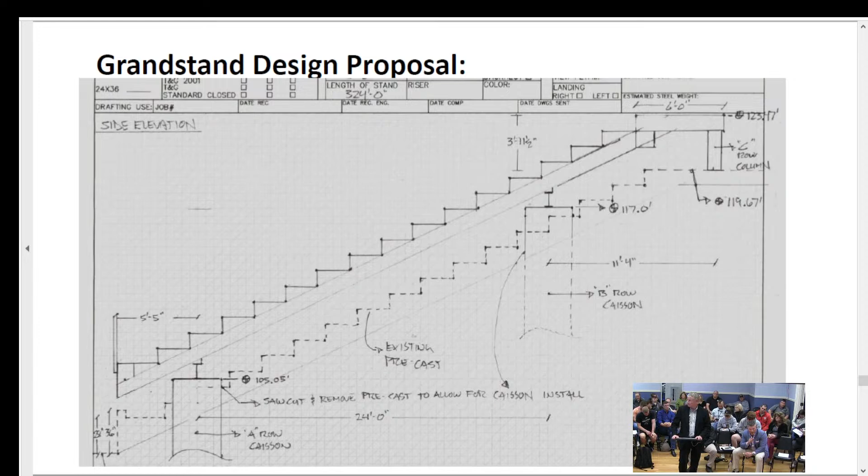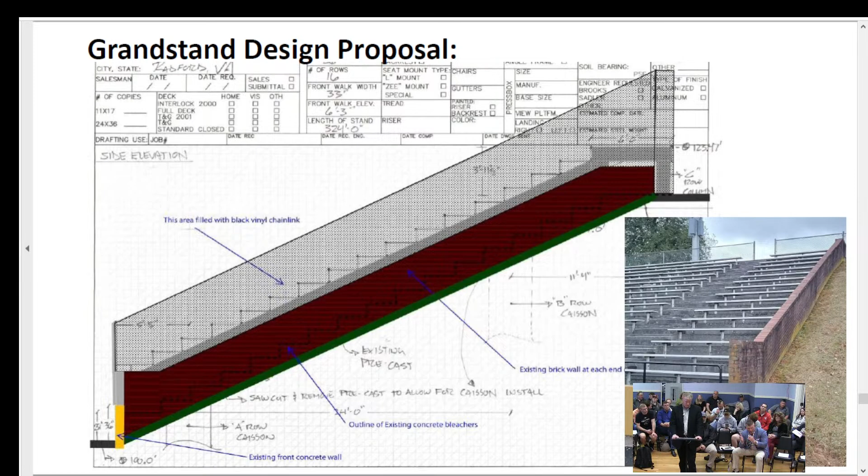What I can say is that if that is a really big concern, I want to point out that my goal at the beginning is always to maximize the seating capacity, and that's what drove my decision on the rear walkway. If it were possible to match the elevation of your existing concrete walkway, it would be done with not so many rows, so you would lose a good bit of capacity.

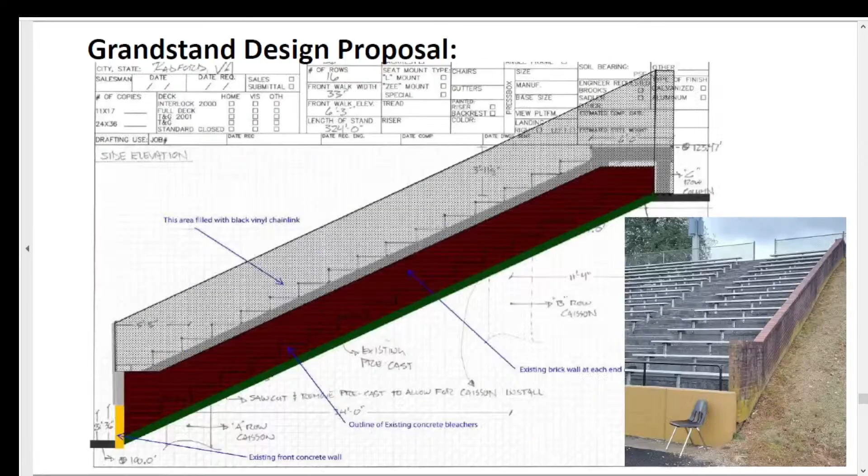I was going to ask that question - so instead of continuing all the way up, we would continue that straight across. That's exactly what you do. So then we're at this level, and you lose that many rows of seats. But you could do that as long as you still had access to get in beneath there. Yes, and we would just need to bring that structure down and tie it to the existing concrete right there. So in essence you'd have your concrete walkway and then an aluminum walkway, because I wouldn't be able to just start seating right there at that point. It would be an aluminum walkway at the same elevation as your concrete walkway, and we would have 3 or 4 less rows, something like that.

We offer that, and I do glass guardrail as well. But the most economical option is the black vinyl chain link, and that's what we typically go with here. So what you'd see on the back is anodized pipe and black vinyl chain link.

But if we lower it to the same elevation, you'd lose seats, but you wouldn't have that guardrail. Could we get the information on how many seats we would lose? I can tell you that, absolutely. I can figure it out, because it could be 20 seats or 2,000 - I can tell you pretty quickly.

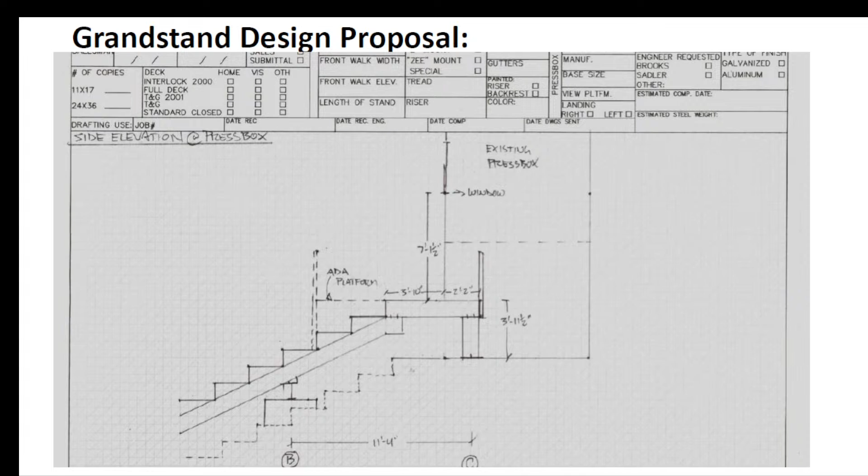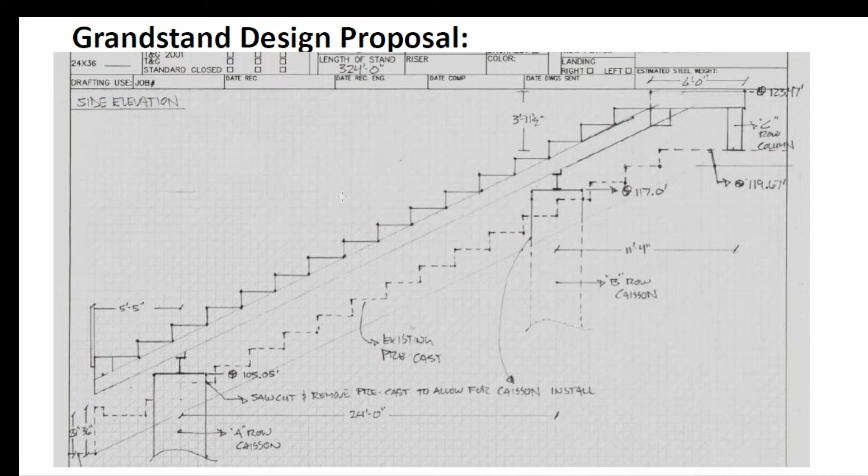If you figure 4 rows, here, let me see - 324, if you figure 4 rows with me, the length of the stand. So that would be, if you go to my plan view... let me find it, sorry, somehow I added a new slide. Did you go out of presentation mode? All right, I did, there we go.

Okay, that's a lot. So the total would drop to like under 2,200. But it could be done, you can do that. Or there's a smaller step and you add another row - there are other options. I assume that would reduce the cost a little bit too.

Yeah, we could keep the same configuration and cut a couple of rows out. If the rear walkway in the design as it is a real problem, then yeah. Like I said at the beginning, I'm flexible, I can pretty much do whatever. I just want you to know there's a give and take with everything. Yeah, that was my question.

All right, do we have other questions for either of our presenters on the board? No? What is your... I guess you're good. Sure, I guess I'll do that. That's fine.

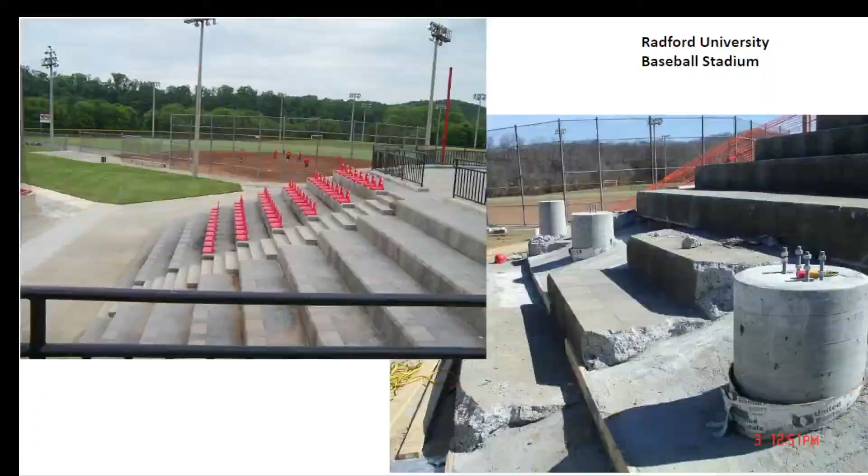If we vote on going with your system, it gives you time to get everything in and it sat there, stored, until... that's what we would do in the second scenario, waiting past football season. Southern Bleacher, the fabricator, loves this, but we get everything done with the approved drawings and everything, and I say, hey, don't ship this until the end of October, early November. Or let's talk, because if you guys make the playoffs, you need it for a couple more weeks. We would be flexible like that.

You wouldn't have to worry about keeping it on site or anything like that. We wouldn't ship it until then, and we obviously wouldn't start doing any foundation or demo work until then.

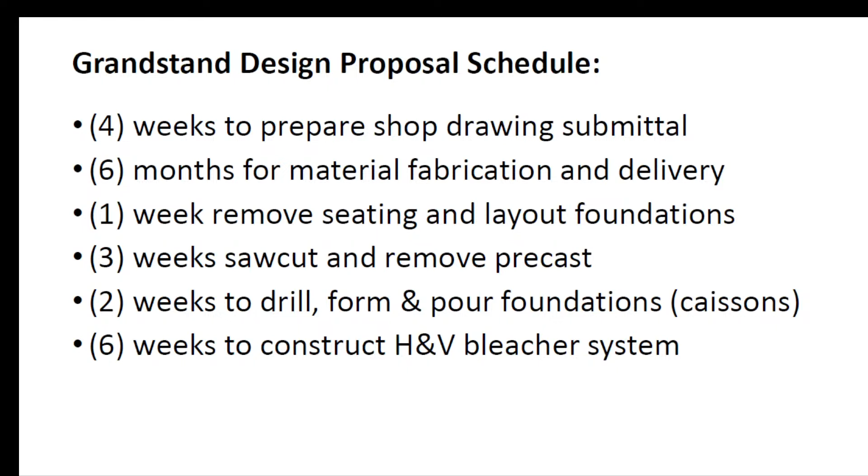But on that note, if you give me some idea of what capacity you need to add to the visitor side to go with the first option, I could at least figure up a price for temporary bleachers to add to that side, so you could have a capacity you're comfortable with for option one, if you decide. So you'd have all the information to know if you want to do that versus the other.

Okay, thank you. To answer your question about knowing the cost, the only thing we really don't know on the aluminum bleacher is what the cost of those improvements might be.

If you want to forego doing it, since he's already said he'll hold his price till after season, you don't have to do any of that this season. You just wait. If we pull the trigger now, yes... Right, well, we understand.

I'm trying to figure out for myself, what's the cost of not touching it until afterwards? What's the timeline if we did it that way? You've answered those, but I guess we need to know the cost of the minimal repair, if you're looking at a minimal viable product to get us through whatever that date would be, with coverage to mitigate any liability we'd potentially be incurring.

That's the real issue, I think. I mean, obviously we don't want anyone to get hurt, but we want to cover that. But there's going to be a cost to that, whatever that cost would be.

All right, any other questions? All right, thank you very much for your time and all the work you've put into these presentations for us, so we can make the best informed decision we can.

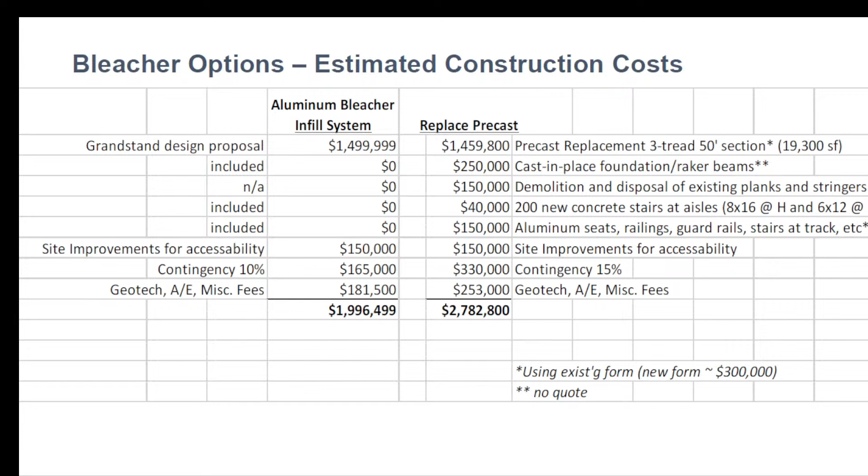Well, thank you very much for the invitation and for patiently listening to everything we had to say. I really, really appreciate it. Appreciate the questions too.

Chris has a long drive back, but I will stay around to listen to other comments, and if need be, I can leave if you want me to. Tell me. Thank you very much. Bradford citizen, you can stay, it's your town too.